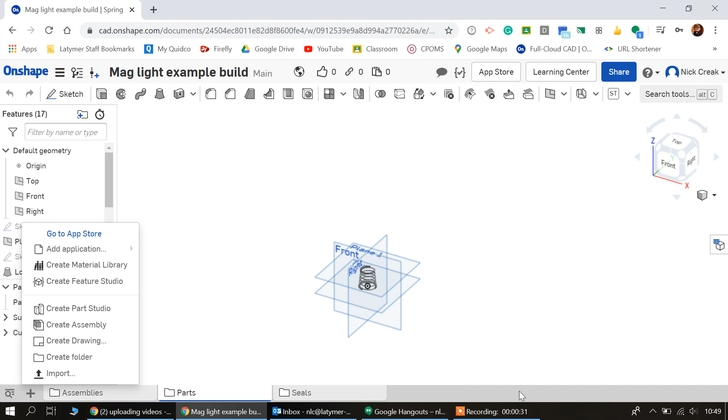So we're going to go into assemblies. Now you've actually already created at least one assembly where you created the end cap with the rubber in it, and you may have created the main body and put the rubber seal in there as well.

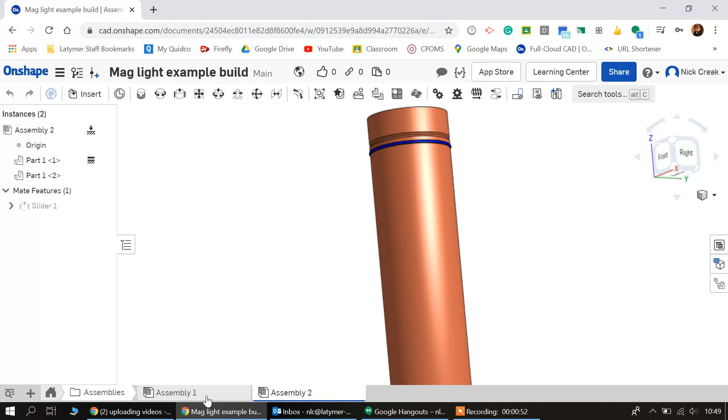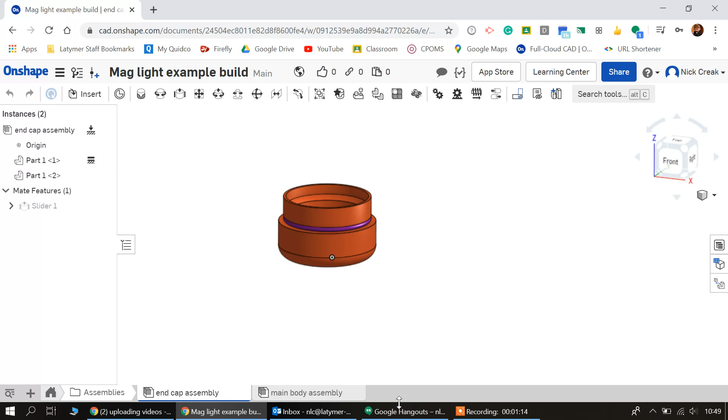So we're just going to rename these. We call that end cap assembly, and we call this one here main body assembly, and we can do a few different assemblies and then we can bring the assemblies together, which is actually a little bit simpler than doing everything at once. So we're going to click plus, and we're going to click create assembly.

And then we're going to rename this as bulb housing assembly. Now you'll notice when you open an assembly, if you've done this before, that there's nothing in here. There's no planes or like front, right or top, and that's because this is a bit like a vacuum of space. There's nothing in here whatsoever.

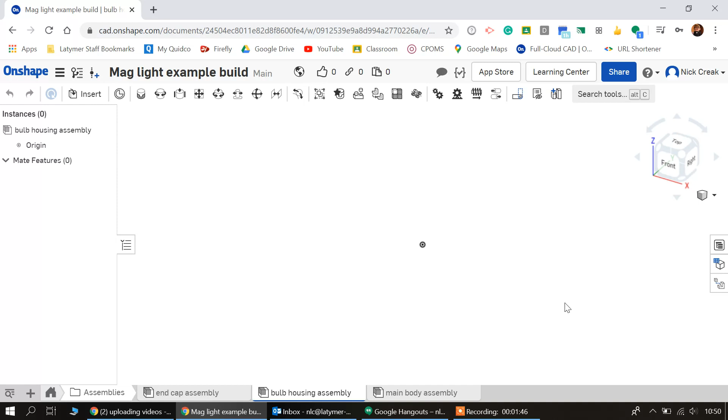If we click on insert, you'll see a list of the parts. Now if your computer's anything like mine, it actually cuts off at the bottom, but we can always search for the part, and then that'll bring up the parts that we want.

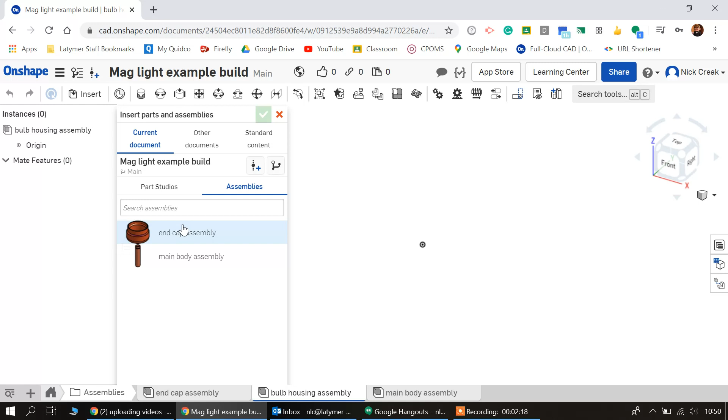So as long as we've called them something that we can remember, we can search for them. We can insert parts, and we can also insert assemblies, and we've got our two assemblies we've done so far here. So at the end, we're going to create one master assembly where we bring our assemblies together. For this particular assembly, we're going to bring the bulb housing, the lens cap, the reflector, and then the seals that we need for that all together.

So I'm going to start with the lens cap, and you'll see we can change anything in this assembly afterwards. So I'm just going to tick that.

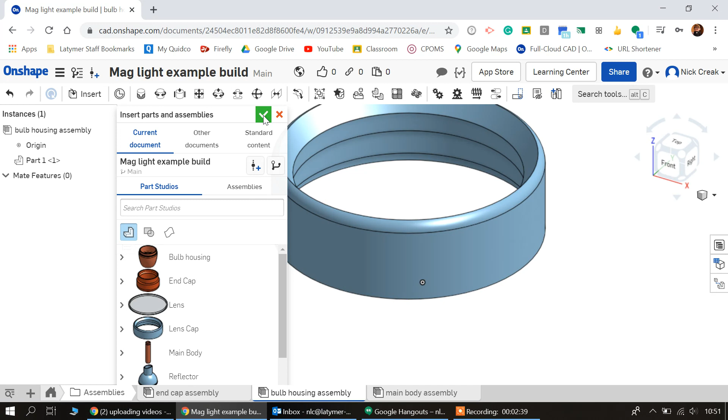So you can see my lens cap there is the wrong colour, but if I go into my parts and go to the lens cap, I can simply go edit appearance, as you'll know what to do by now, change the colour, and when I go back into my assembly, I go into my bulb housing assembly, you can see it's changed the colour.

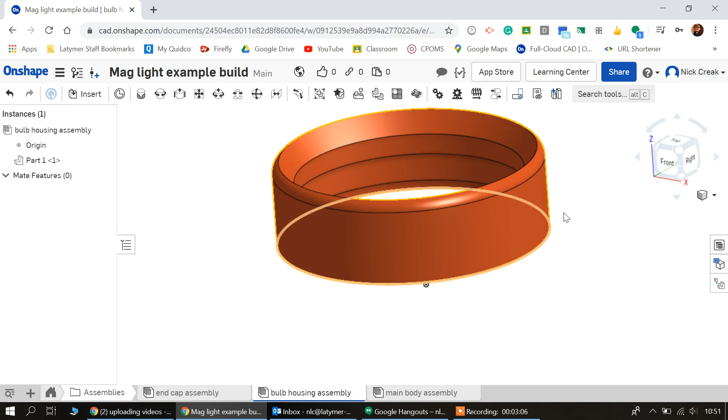Now that includes if we change any sizes or dimensions, we can then go back and update this, which is a really useful tool to make sure everything fits.

So the first thing I need to do is take the first part, right click, and fix it in place. And you'll see a little symbol up here comes, which is part is fixed.

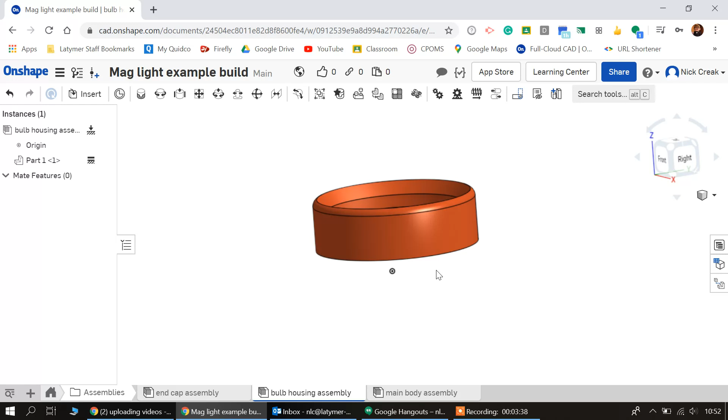Now the reason for that is if I try and move parts together and both parts can move, they're not fixed down as if they're clamped together, then they can actually just move apart from one another, which is really annoying. So if we just fix that part, we alleviate that problem.

So the next part to bring in is the lens. So I'm going to bring the lens. Now if you've built it in the same way I have, then the lens will be exactly right, so this lens can simply sit up inside there.

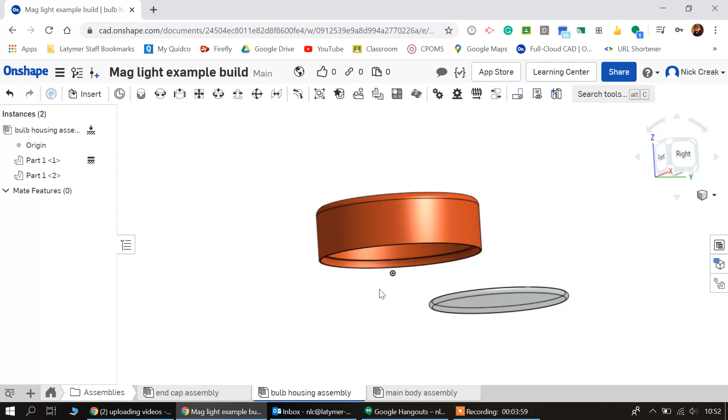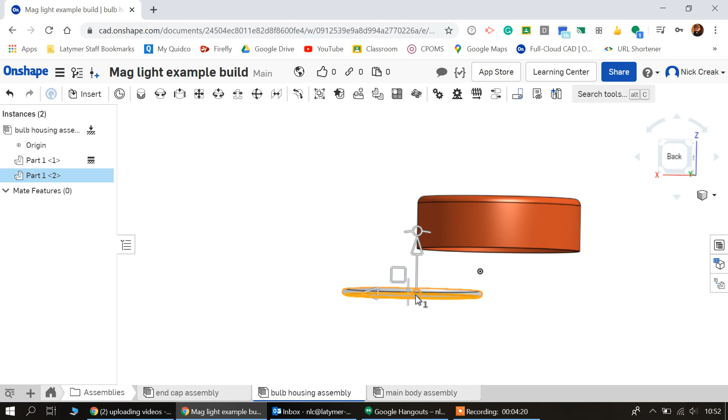However, if yours is at 90 degrees to this, we can change the degrees quite easily with that tool. So if I click on it, I can change the angle. And that's also the same if I change to that direction. I could also change it in that direction. So if yours is facing the wrong way, just simply get it in the right direction.

Now up here we've got some things called mates. And a mate is basically mating two things together, bringing two things together. So we need to get this top surface to sit just underneath this lip here.

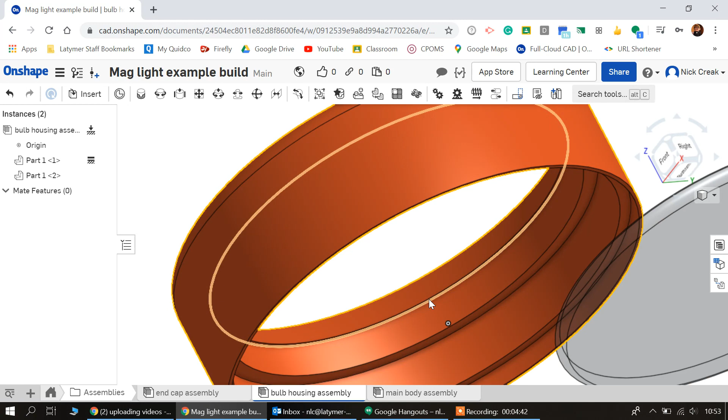So to do that, I'm going to use what's called a planar mate, which is that one there. And if I hover over the top of the lens, you'll see it automatically snaps to the middle, which is really useful. If I went on the bottom, it would automatically snap to the bottom of the part.

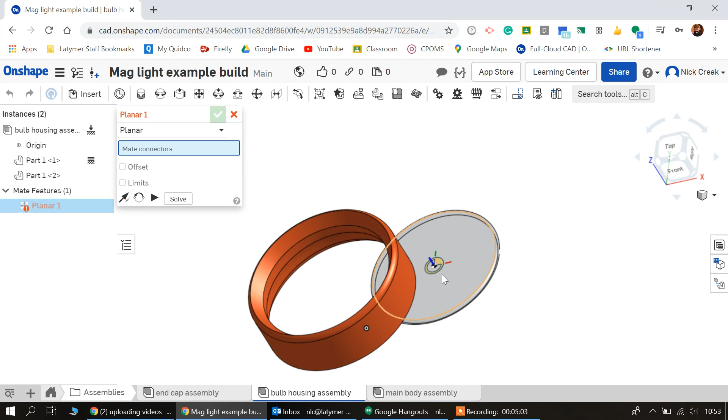Click once, and what that will do - I had to actually click twice for some reason - it will then highlight that I'm going to move this surface, and it's asking me what surface I want to go to. So I'm then going to select this here. You can see it automatically brings up a symbol there showing me I've got the middle.

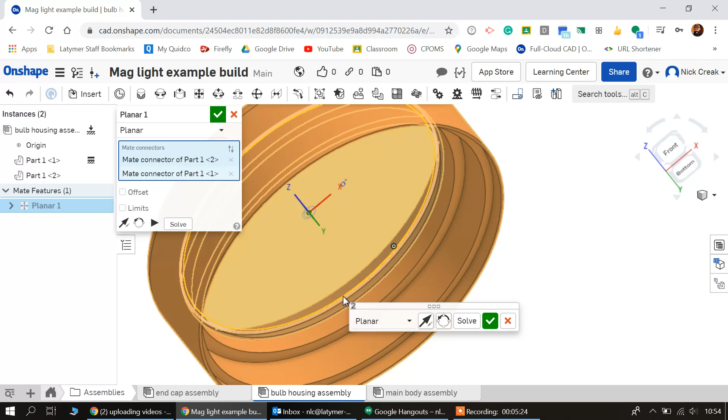Click, and then I'm going to tick that. So that's my lens in place, but we want to check it's in the right place. So what we can do is use our translucent tool, and I can see that the top lines up perfectly inside and there's no overlap, which means that's correct. So that's great.

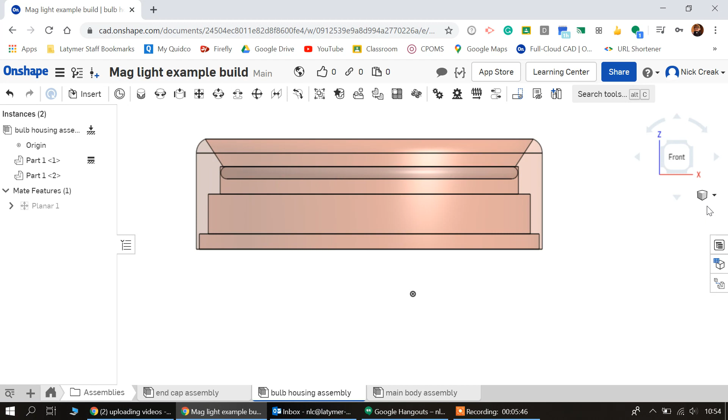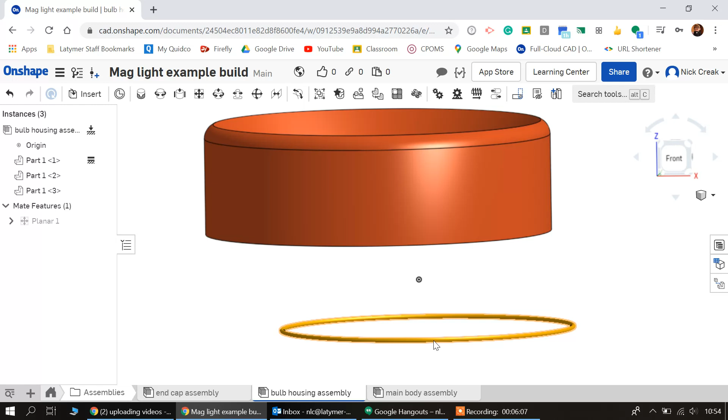Now we're going to insert our lens rubber seal, you can just see it there. I believe this is the one that I made yellow. You tick that. Again, if it's in the wrong orientation, you'll just need to click on it and change that orientation. So this here is going to sit just below that lens.

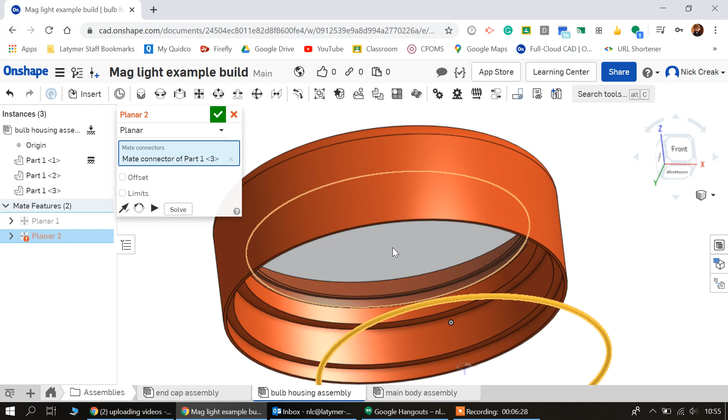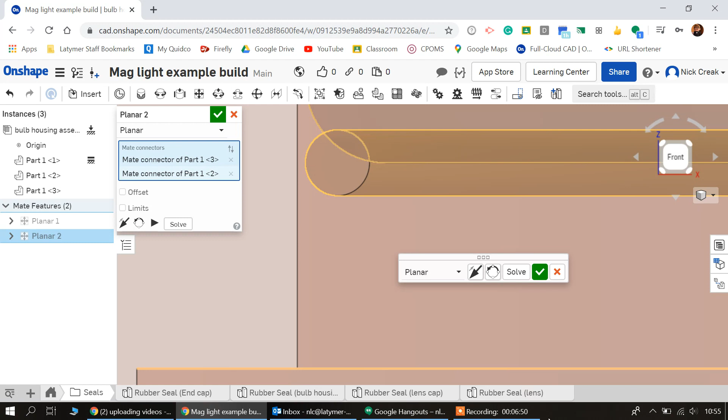Now I'm going to use a Planar mate as well. I'm going to hover and click, and then I'm going to hover below the lens and click. Now this time, if I look at the translucent, because that was a completely round surface, I actually selected the middle between the two. So if I have a look here, we can see they overlap, and they overlap exactly half. Now what I can do is I can go into my seals, find the lens rubber seal, and just learn its diameter.

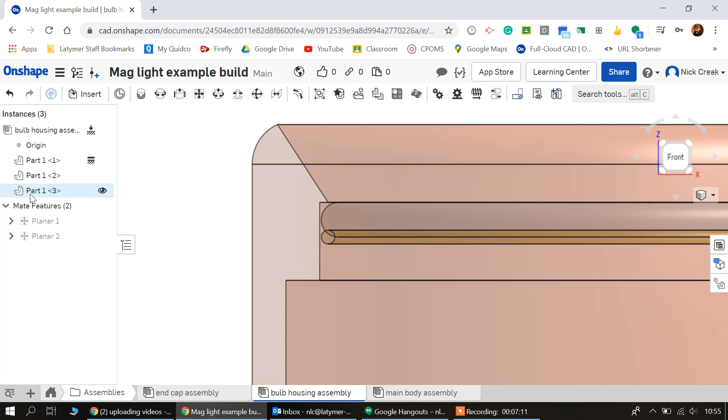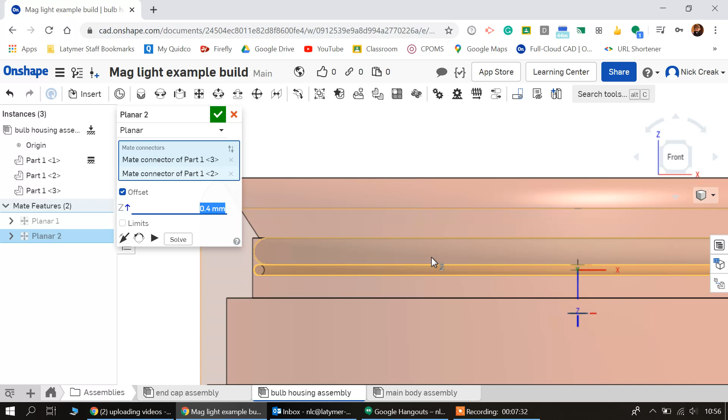So it's 0.8 in diameter, and at the moment it's halfway too far up. So if I select 0.4, I go back into my assembly here and double click this Planar mate, which is the one we're working on. I need to move that down by 0.4. Now we can see down is the Z axis, Z is up and down. So if I go here and click on offset, it will ask me, and if I change that to 0.4, you can see it just hopped down. So if I click the tick, we can see that rubber seal is now sat exactly where it needs to be.

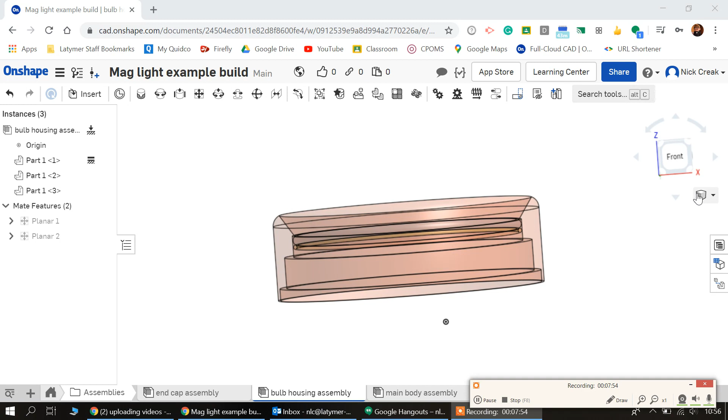So that's great, so far so good. So logically, you might think that the next part to bring in would be the reflector. But actually what I'm going to do, I'm going to bring in the bulb housing first, and that will become more apparent in a minute.

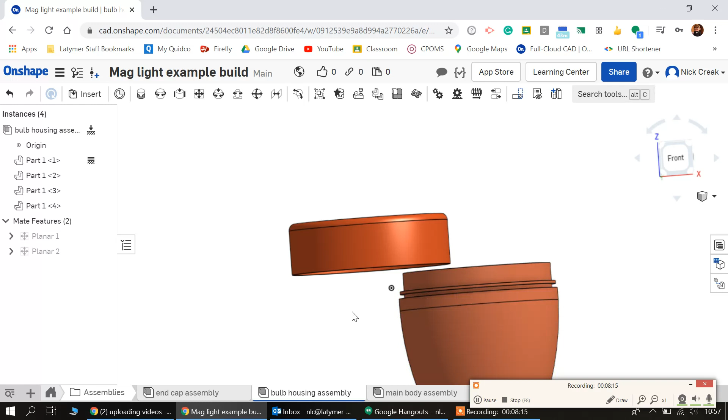So there's the bulb housing. You can see I actually got my colours a little bit wrong, and this part here actually sits over the top here and in and rests on this surface here. So that whole thing comes over the top.

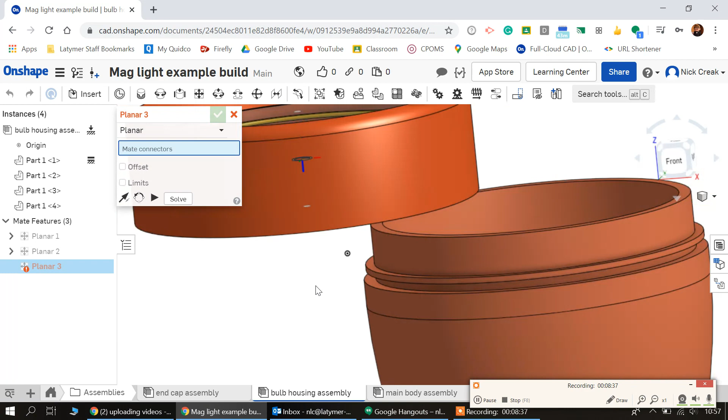So what I need to do, I'm going to get my Planar mate. I'm going to grab that surface there, and we can see it grabs the middle. So I click, and then I want to line that up with either one of these two, because there's a slight ridge there, and we can see it's moved it across.

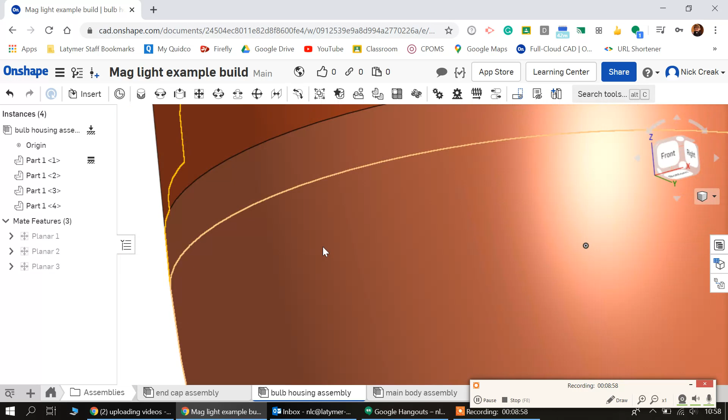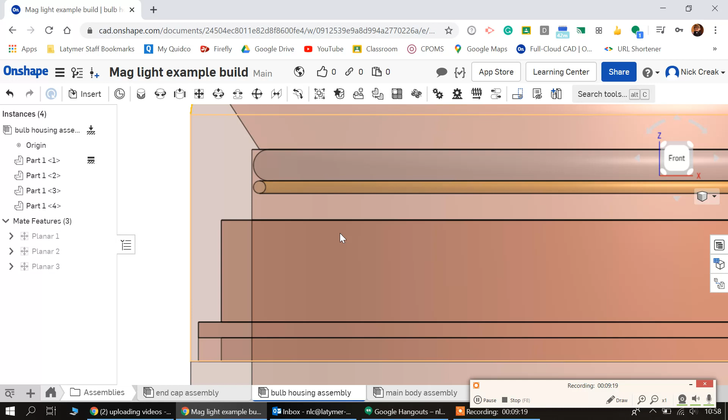I can tick that, and again, if I go to translucent, now things are starting to get slightly more complicated now, but you can see the bulb housing is actually sat exactly where it needs to be, and there's no overlaps whatsoever as it sits in there. So that's great, again so far so good.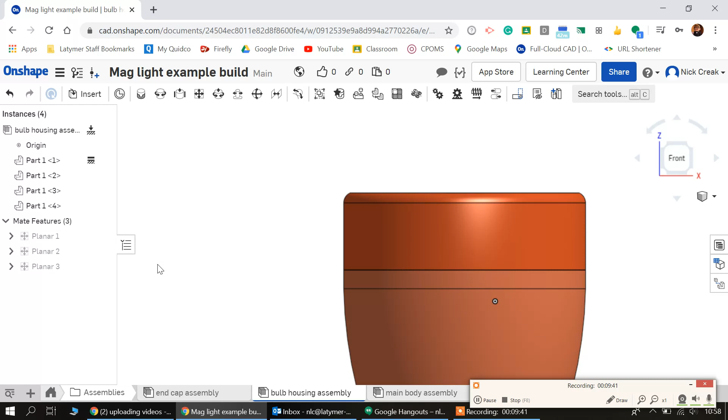Now there's two parts left. There's a seal that sits just inside here, and there's a reflector that sits on the top there. Now you might think, if I go back to being shaded, there's now not an easy way to actually get into there. But what we can do is, if we go over to here, we can actually hide different parts that we don't want to see. So we're now left just with the bulb housing.

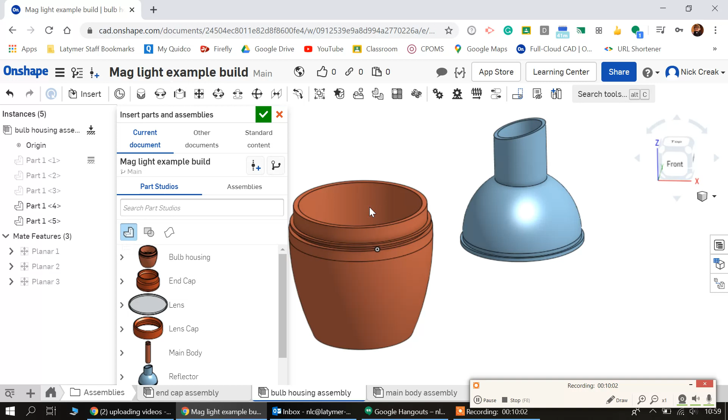I can then insert my reflector, and this is an example of where actually I've built it in the wrong orientation. But that's not the problem. All I've got to do is flip it by 180 degrees. So I can click on it, start to drag, let go, change it to 180 degrees, and then click off the part.

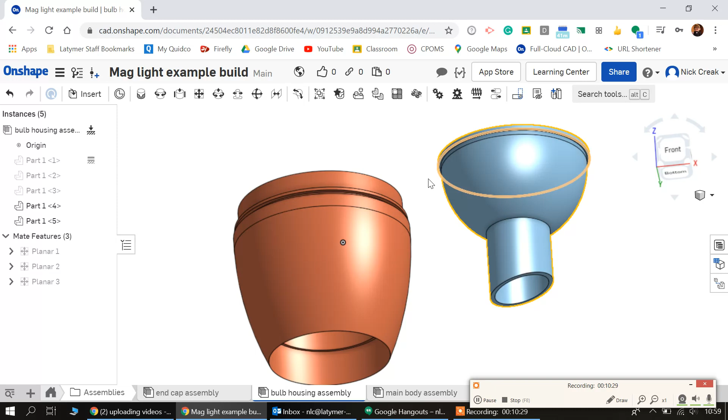So this reflector is going to sit just on this surface here with the bottom edge there. So I'm going to use a Planar mate again. Either one of these two will do off that bottom edge, and you can see it's already grabbed the middle. Click, select it there, tick, and we just want to make sure we're happy with it.

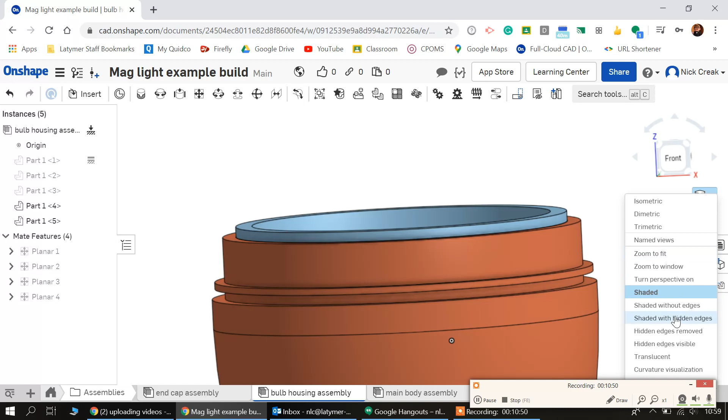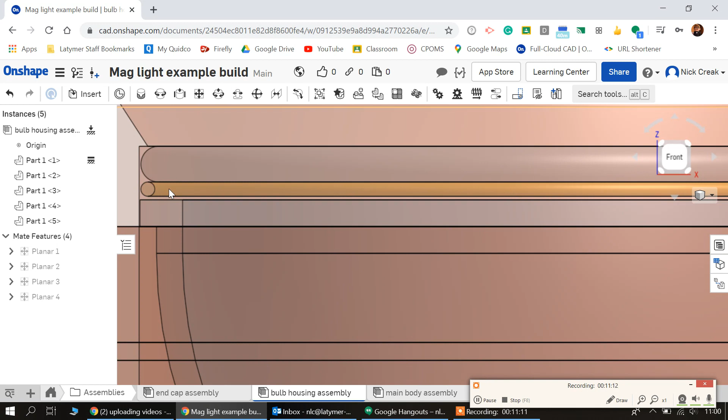So again, we can go translucent. Now as the part builds up, it starts to get more complicated, but we can see that sat on that edge there. And if we stay in translucent and we start to add our parts back in, we can see that the rubber seal is sat exactly where it needs to be. The reflector's where it needs to be. There's the lens, and then there's the end cap. So that's great, so far so good.

So that's the bulb housing assembly now built up with all of those parts.